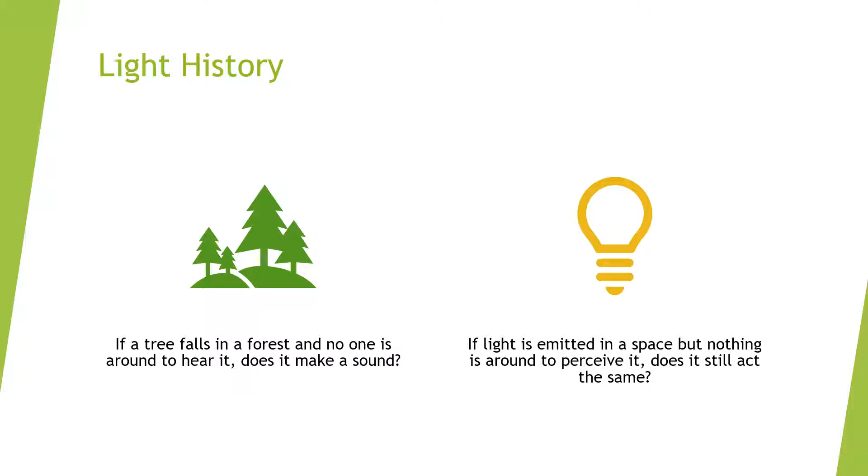So getting into the history of it, I'm sure you've all heard this before: if a tree falls in a forest and no one is around to hear it, does it make a sound. The equivalent in the lighting industry is: if light is emitted in a space but nothing is around to perceive it, does it still act the same? We'll get into that later.

Light's been around a very long time, obviously. We've been experimenting and exploring it for a very long time. One of the first documented instances—emphasis on documented—was with the ancient Egyptians and Mesopotamians. They developed the first thing you would call a lens from polished quartz. There's a bit of a lag there, and then we see a huge push of understanding, questioning, and theorizing with Alhazen.

He's not Persian—I'm forgetting the territory, I apologize—but he's considered the father of optics. It was in the 11th century.

He proposed a lot of what was later experimented and hypothesized and actually carried out in the 13th century. We see that with Roger Bacon. He kind of gets credit for this, though there are several who have done research on this, and it's that light refracts from objects. Then later we see the first wearable eyeglasses invented in Italy around 1286. This led to an optical industry in the 13th century, particularly around the Florence and Venice city-states territories, and this development and standardization and understanding of how light behaves and how we can influence its behavior led to the inventions of the optical microscope and the refracting telescope.

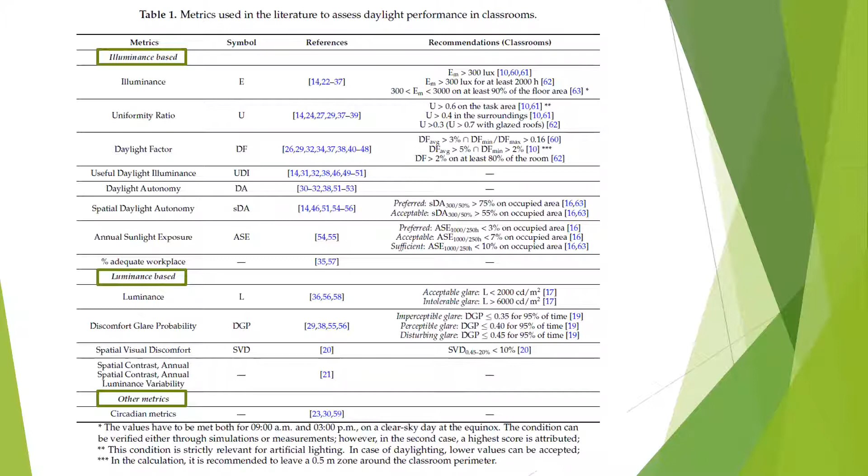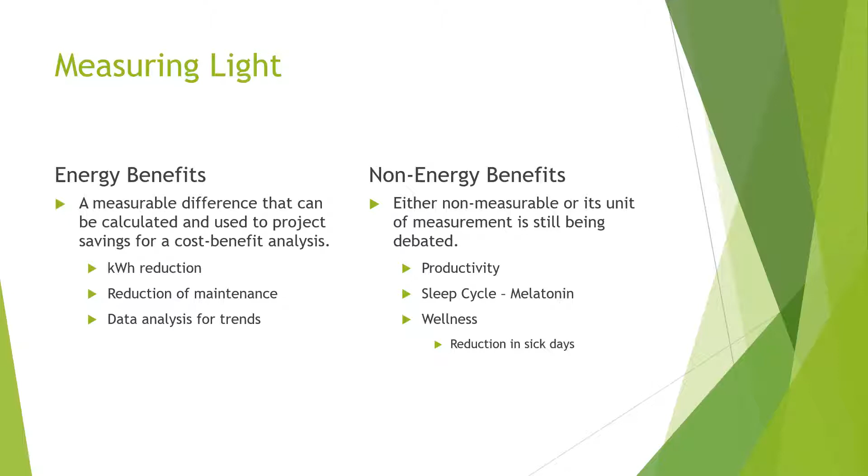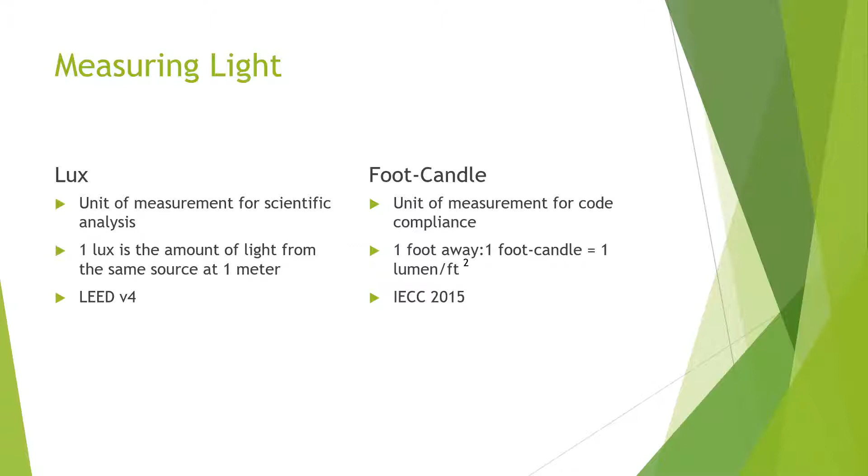I'd rather do calculations with lux than I would with foot candles. Foot candles being the unit of measurement for code compliance. So 1 foot away, 1 foot candle is equal to 1 lumen per square foot. You'll see this in IECC 2015, 2018, etc.

So if you want to know more about foot candle recommendations and recommended guides for space types or buildings, you can check out the Illuminating Engineering Society - just Google IES foot candle recommendations. In addition, manufacturers in like the last 5 years or so have begun developing their own recommendations to go with their products on what they feel the recommended light level should be for space types and how their fixtures can be programmed to meet those needs.

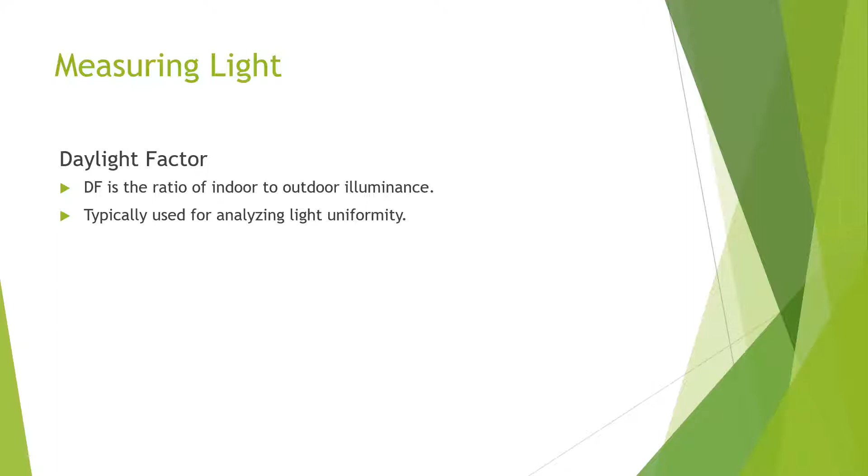So daylight factor, this is kind of the original measurement value. It's the ratio of indoor to outdoor illuminance. It's typically used for analyzing light uniformity.

And that leads us to the useful daylight factor / illuminance. So it can be presented as factor or illuminance, just keep that in mind. But it is the percentage of time when useful daylight is available, i.e., during building occupied hours.

So it's just taking the weather data from your city, your climate area, and then specifically applying it down to your site, plotting that and figuring out the angles of incidence for solar altitude, figuring out how often the sun is going to be available, whether it's mostly overcast or mostly clear, or a hybrid mix in between. That's going to help you inform what daylight strategy you want.

So if you have a site where it's mostly overcast, like in this example they have in the book, St. Louis, Missouri, you can still do daylighting - you're just not going to do it in the traditional sense. Skylights, believe it or not, actually receive more light on overcast days than they do on clear days, and that has to do with the sky radiation and diffusion of sunlight.

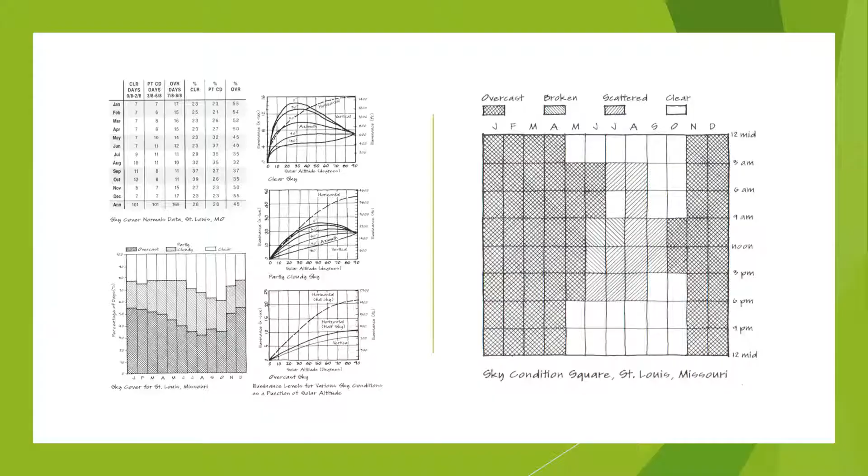So why did we move away from that? Well, there are some limitations. It does not consider non-overcast sky conditions. There's no glare consideration, and it typically recommends oversized windows. So we're over-designing.

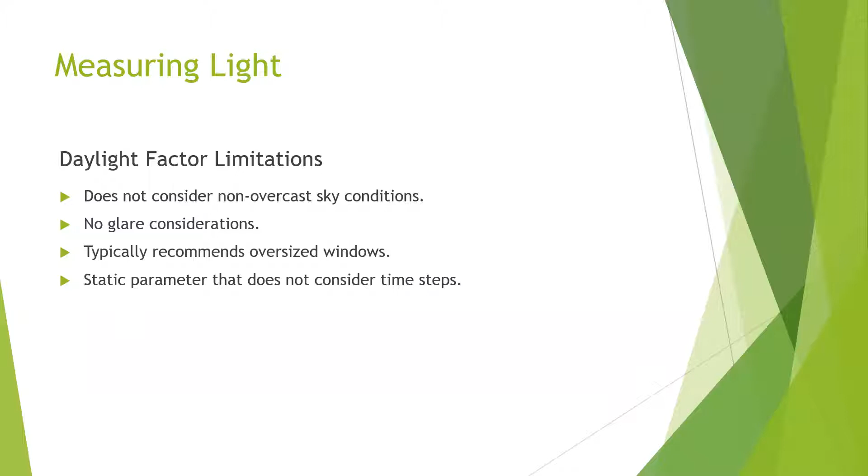And then it's a static parameter. It doesn't consider time steps, so it's not accounting for occupied hours throughout the entire year, various times of day, depending on what your building occupancy is. But that's not to say it's worthless and we should do away with it and never think about it. It's mostly just for early design, to get you started, so you can understand where you are, where you need to go, and how much work that's going to be.

So daylight autonomy is kind of what replaced that. It's an annual daylight metric, but it's now referred to as a dynamic daylight metric. That's mostly because people tend to confuse daylight autonomy with spatial daylight autonomy. I know it sounds weird, but they are two separate terms and they mean different things.

It's expressed as a percentage of annual daytime hours for points in a space that are above a specified illumination level. Notice I didn't say anything about space or area. That's daylight autonomy—it cares about the quality of light for annual daylight hours for points in a space. It doesn't care about how much area you have, what's illuminated, what's not. It's just trying to understand what is the daylight autonomy of this space or building, if you're doing a whole building.

So this was first proposed in 1989. I'm not going to even try to pronounce the name—it's French, I'm sorry. But it's basically the French version of the Illuminating Engineering Society. If you weren't aware, IES is referred to as IESNA internationally. But it really takes off and gets picked up for standardization later on, thanks to a gentleman like Christoph Reinhart, between 2000 and the research he did between 2001 and 2004.

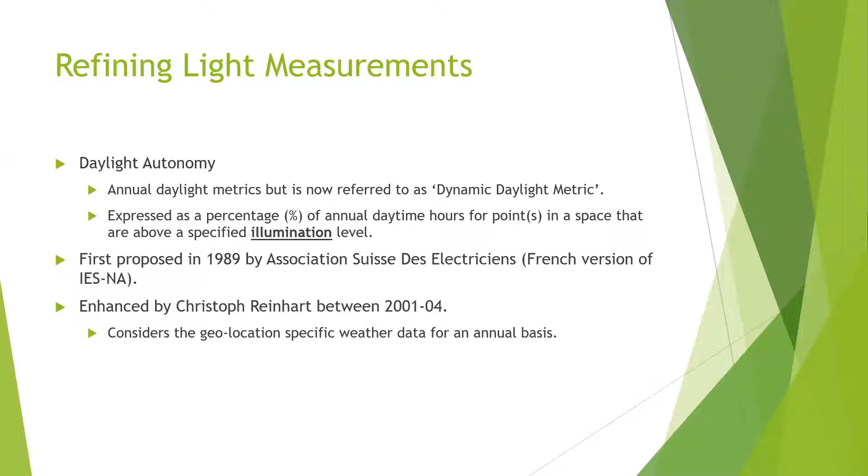What's so special about this research is that it considers geolocation-specific weather data on an annual basis. So the definition of daylight autonomy was reevaluated to be measured according to defined sensors elevated above a floor area in spaces. It calculates the amount of daylight illuminance required for a specific task over occupied times of the year. Minimum thresholds were determined by IES.

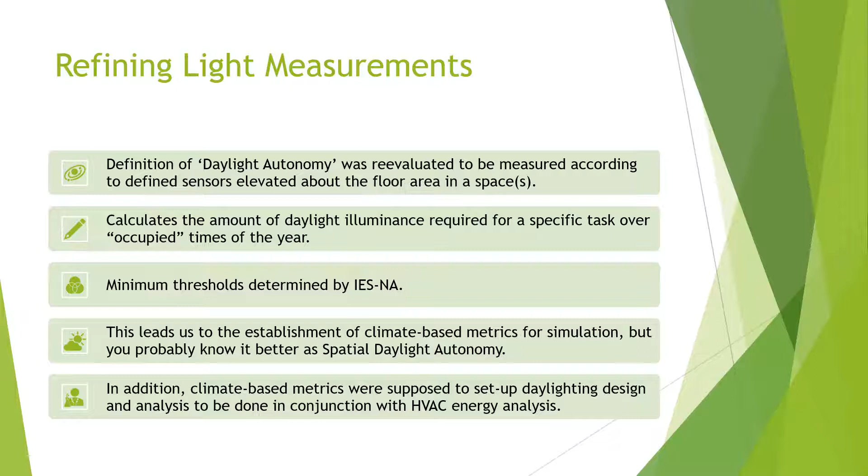This leads us to the establishment of climate-based metrics for simulation, but you probably know this better as spatial daylight autonomy. In addition, climate-based metrics were supposed to set up daylighting design and analysis to be done in conjunction with HVAC energy analysis. Now that exactly didn't happen, unfortunately, but I'm hopeful that with the changes made in 4.1, it will encourage or incentivize that to actually become a reality.

So let's talk about spatial daylight autonomy. SDA is the percentage of a space that can be daylit most of the time. It's written like this: you'll see SDA, and you'll see 300 over 50 at 55%. The 300 over 50 isn't set in stone—that represents the minimum threshold you're setting your lux value to. In this case, it's 300.

And then you want to know how often it's meeting that threshold. So in this instance, we want to know how often, 50% of the time, it's meeting 300 lux. So you'll see it expressed as 300 over 50 at 55%. What that's saying is at least 55% of the area is illuminated to 300 lux at least 50% of the time.

Annual sunlight exposure, or ASE, is the percentage of a space that receives too much illumination, resulting in glare—so this is our ceiling. It's written the same way, but it has different thresholds because it's our ceiling, not our floor. So ASE 1000 is 1000 lux, at 13%, meaning no more than 13% of the space receives more than 1000 lux for more than 250 hours per year.

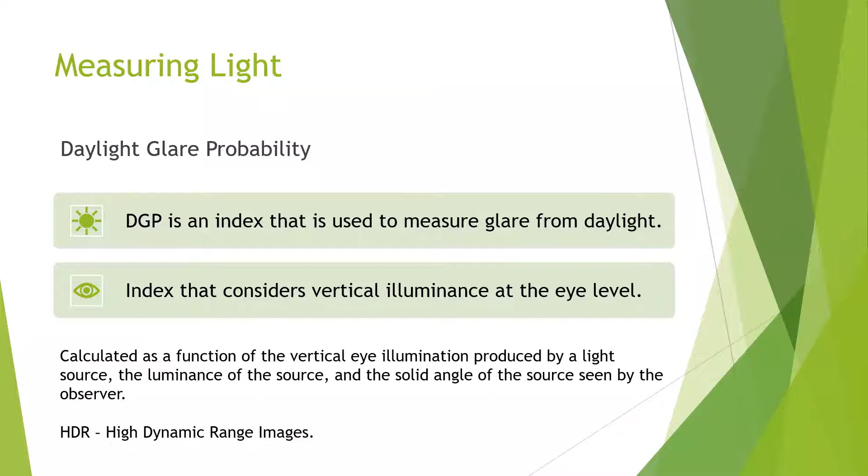Commonly, it's not agreed upon what the actual range is, and what people find uncomfortable versus tolerable. However, the general consensus on the best way to investigate this is through high dynamic range imaging. I want you to be aware of that, because that's what ASE is trying to do—it's trying to standardize predicting when in a space there's going to be too much light that makes the occupants uncomfortable.

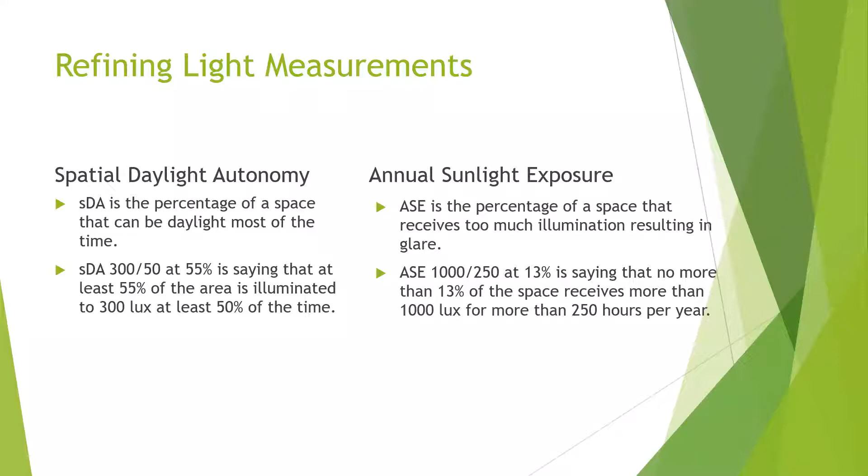So let's get into the standardization of lighting measurements. This is an example I like to use, LEED versus IECC 2015.

If a space is considered regularly occupied, it will be considered for the LEED daylighting analysis, and I mean the entire space. That includes the primary daylight zone, the secondary daylight zone, and the tertiary daylight zone, which is basically just the remainder of the space.

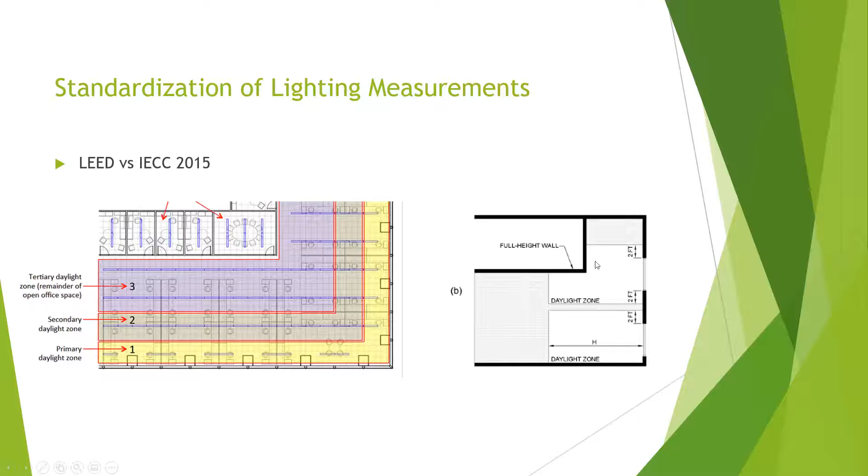Whereas IECC has a predefined script for you to follow. It'll tell you to take from the floor to the top sill height of the window, and that's your H - how far your daylight zone extends into the space. Then the width of your daylight zone is the width of the window plus 2 feet until you get to a full height wall or obstruction.

Spaces with a total of more than 150 watts of general lighting within side-lit daylight zones, complying with side-lit daylight zones, are required to have photo controls. LEED doesn't really ask you about photo controls or anything like that - that's more of just the IECC side.

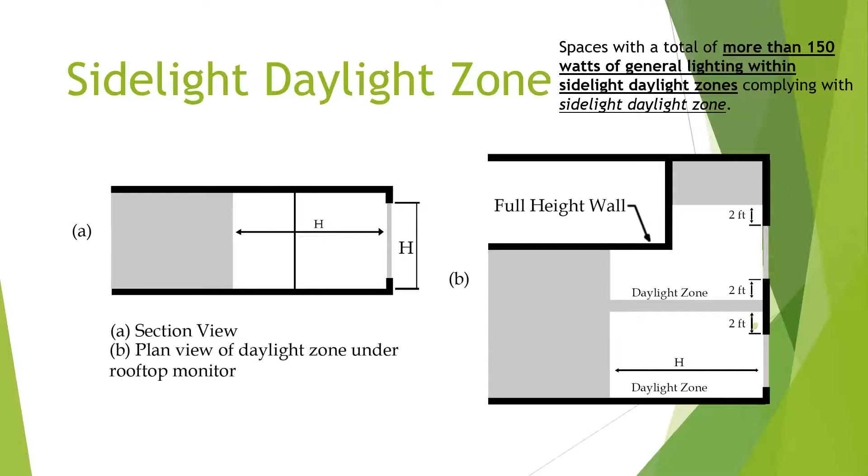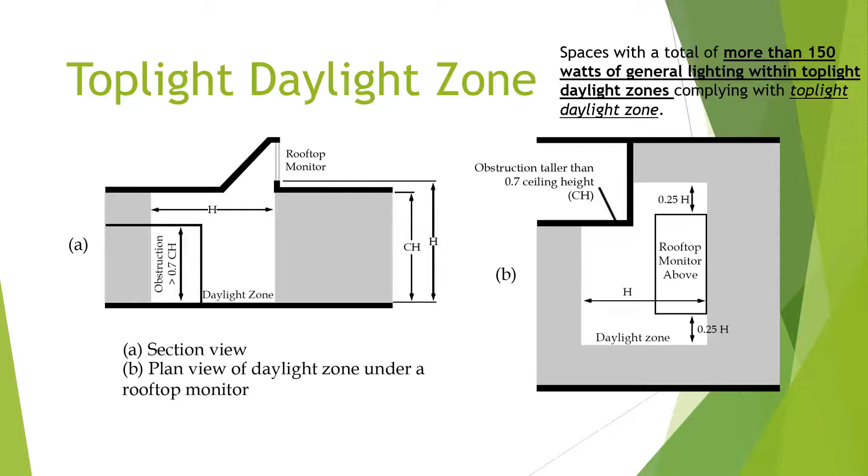But I just want to give you an example of how it defines its daylight zones. Then you have top lit daylight zone, which deals with rooftop monitors, clerestories, Solatubes, and it also deals with skylights in a particular way. But we're not here to talk about IECC, so just wanted to breeze through that.

Let's talk about LEED now. LEED stands for Leadership in Energy and Environmental Design. V4 introduced the use of climate-based daylighting, spatial daylight autonomy, as a simulation-based compliance path for the daylighting credit. The reason why is SDA has been shown to be a reliable indicator of occupant perception of daylight availability.

So what that means is basically 9 times out of 10, what we simulate is actually what it looks like and is perceived as in the real world. That's why SDA has been such a strong metric for us to use.

ASE is kind of where we get into a problem, but that deals with the illuminance versus luminance based metrics. The intent is to connect building occupants with the outdoors, reinforce circadian rhythms, and reduce the use of electrical lighting by introducing daylight into a space.

I'll tell you right now, none of that is true. None of what LEED requires incentivizes you to do any of that. So I appreciate the intent, but the execution is not really there.

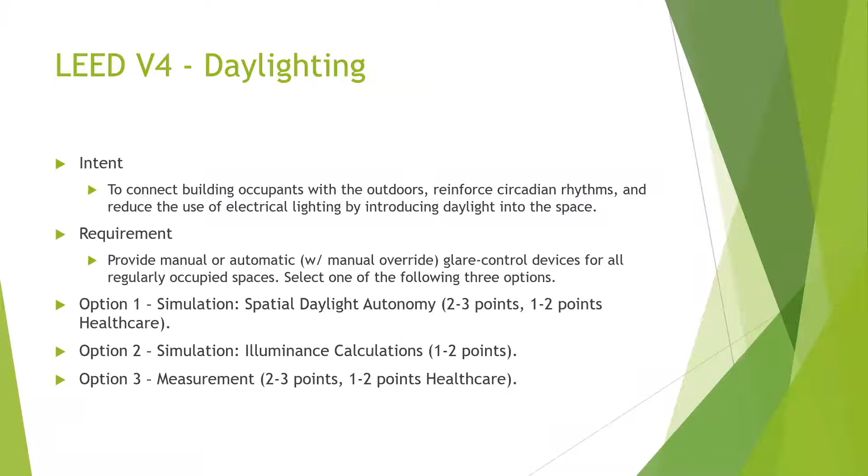So let's get into option 1. Here's what option 1 looks like. Probably the biggest problem I have with the LEED daylighting credit is the second bullet point of 'use regularly occupied floor area.' That is such a broad, generic term that it literally fits almost everything in there.

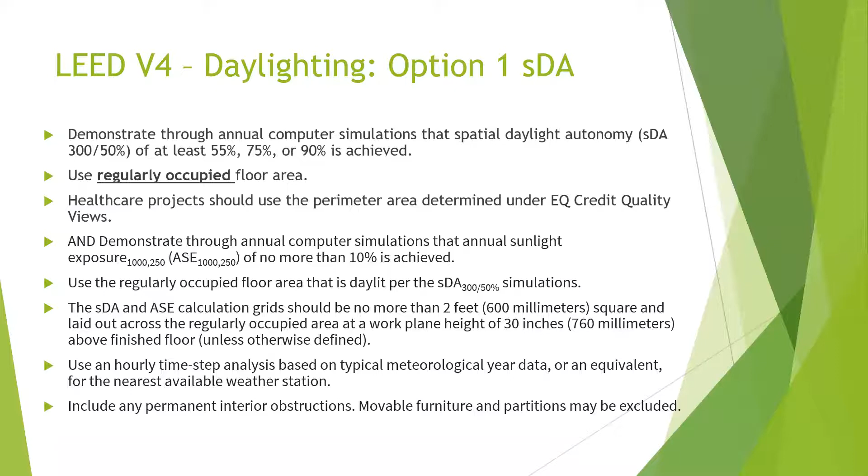So that's probably my biggest problem with it. But let's get in and break it down point by point. Kind of what I define to be regularly occupied is a space within a building that will regularly have occupants within a space during business hours.

Now that can be open to interpretation and challenge, because what do you define as regularly occupied? Is it people coming and going into a space frequently, or is it someone coming into a space and staying there for an extended period of time? There's multiple ways you can interpret this definition.

But typically what it does exclude are the generic ones right out the back: mechanical, electrical, restrooms, probably get away with excluding a vestibule, things like that. But that's one of the biggest cons I have - for the V4 version, it doesn't actually define or give you parameters to define what will fit into this box and what won't.

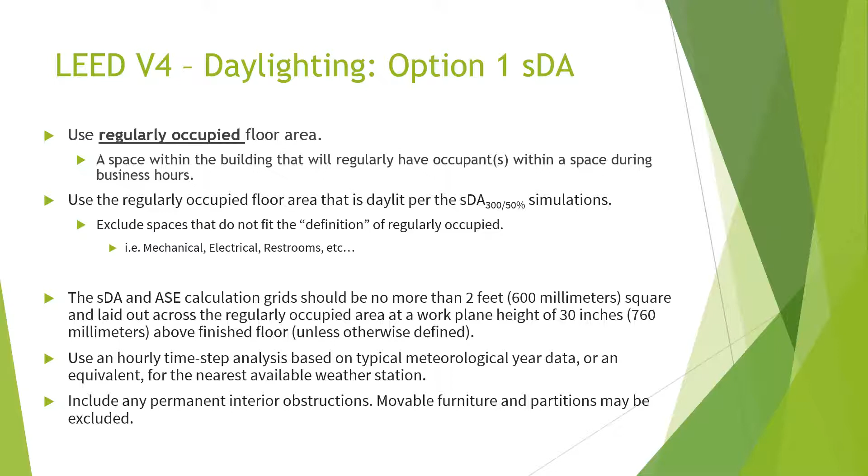So then the calculation grids, where you're placing your sensors in the building. The grid should be no more than 2 feet apart, so you can go less. I would not recommend going less than 6 inches. It's going to be more heartache and way more computational power than you want to expend, but laid out across the regularly occupied area at a work plane height of 30 inches above finished floor, unless otherwise defined.

So here's kind of what that looks like. Some of it's open to interpretation. They don't mention it in V4, but there is an IES standard called LM83 that references spatial daylight autonomy and ASE. It gives you recommendations for placing grids and how to do that. That's where I get that no less than 6 inches from. But here, I could include this row of sensors or I could exclude them, and that's the way you determine if you should do that or not. It comes from that LM83 standard from IES.

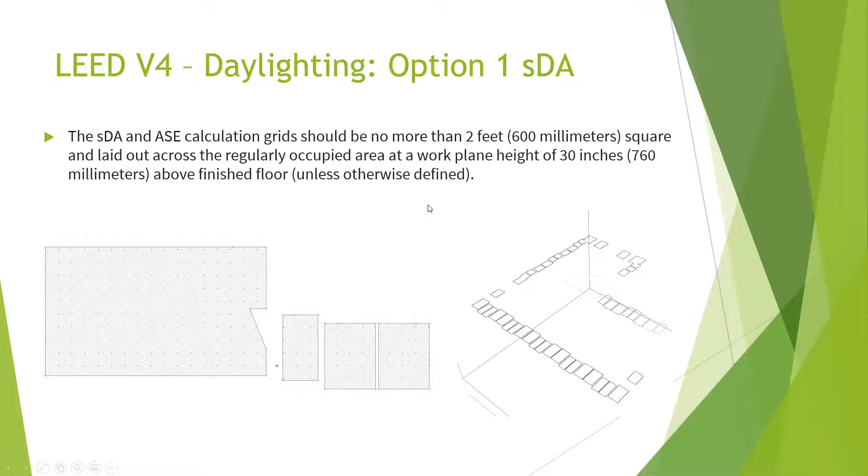For example, like this one right here, it populated sensors on here for whatever reason, so I had to go in and tell it, hey, don't include those sensors, they're in the wall. So just up to your discretion. Typically the 2 feet by 2 feet is enough resolution to get you an accurate picture of what's going on inside the space while minimizing computational time required for the simulation.

So next, we're going to need to do an hourly time step analysis based on typical meteorological year data, i.e. your typical TMY, TMY3 weather file.

And this one was more open to interpretation. You could do 8 a.m. to 4 p.m. or 9 a.m. to 5 p.m. if you just explain why the building occupied hours were slightly different than what they standardized. But those are the two that I typically have been asked to use in projects.

And then lastly, it wants you to include any permanent interior obstructions. Movable furniture or partitions may be excluded.

And so the reason why this is important, we have our design tools here at the IDL Boise website. It's under services, so if you click on design tools, we have a handful of them, but the one I want to show you right now is a daylight pattern guide. And so if you go there, you click on patterns, and you go to workstation partitions.

This is why modeling permanent furniture and partitions in spaces is very important, because they will affect the performance of the daylight in the space, either by helping you or it could hurt you, depending on how you design and the height of your partitions. I would not recommend having any partitions above 30 to 36 inches, that's just my recommendation, if you can. So that's what this scenario looks like: basically the partition is at desk work plane height, so you still have it to divide and help define the space, but it's not hindering daylight as much as if it was open, and in a simulation I can exclude these to help because the work plane height is just above it.

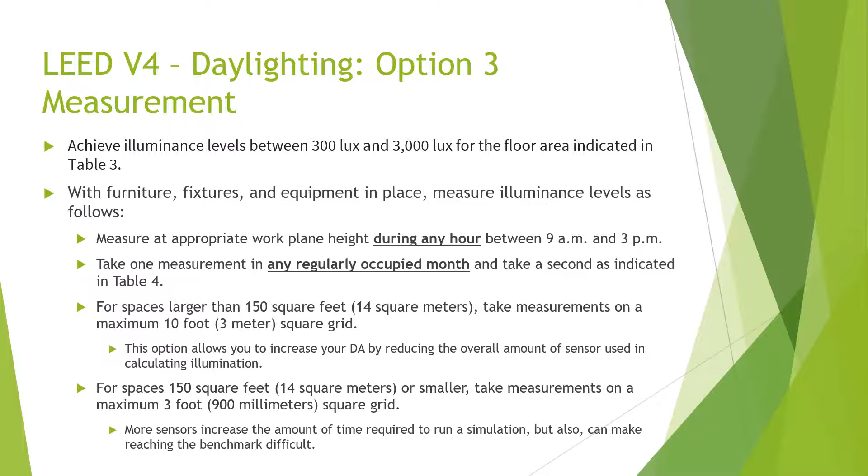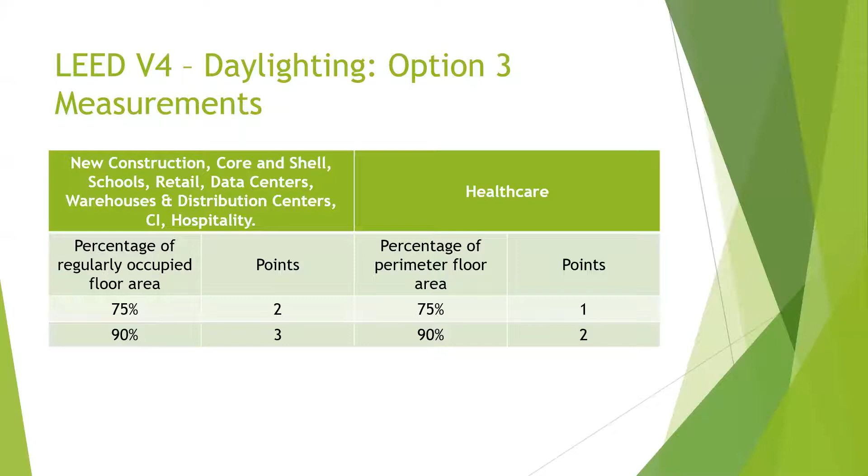And this is what the table looks like for scoring: you need the 75% for 2 points and 90% of your area for 3 points. What it's talking about when it says your first measurement is any hour of any day in the month from the first table, between 9 a.m. and 3 p.m. So let's say we choose May, because May is a good month.

We know from our basic annual simulation that May performed better than all the other months, so we're going to choose a day in May for our simulation. Then for our second one, we have to choose somewhere between September and January. So that's what that means. Are there any questions so far? That was me just giving you the overview of V4. So if you have any questions before we get into what's changed, just let me know.

Okay, so the intent hasn't changed, as well as the requirements - still asks to provide manual or automatic with manual override glare control devices for all regularly occupied spaces. One of the things I liked about 4.1, the changes they've implemented, was it lowered the bar and gave different tiers that you can apply for. Probably the biggest one is that you're allowed to, not really exempt, but appeal for an exemption for if a space should be regularly occupied, i.e. if it should be included in the area calculations for your daylight performance. Those are the big changes that I've liked that they've done, so we're going to go through some of those.

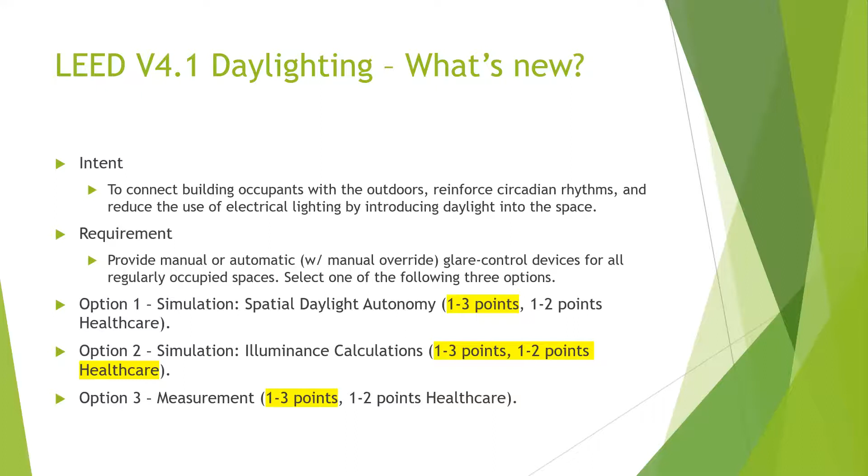Healthcare projects must use each regularly occupied space located in the perimeter area determined under EQ credit quality views. I mentioned healthcare a little bit, I'm on the detail for it. The reason being is you should not be daylighting your hospital. The only 2 space types in a hospital, in my opinion, that should be daylit are the lobby and the patient recovery room.

Now, as said, exemptions can be made. Say a medical facility is for rehabilitation, things like that, of that nature, where there's not actual procedures or anything like that—so like retirement homes, those healthcare project types, you should be considering for daylight, but definitely not hospitals.

Additionally, calculate the average SDA 300 over 50 value for the total regularly occupied floor area. For any regularly occupied space with ASE of 1,000 over 250 greater than 10%, identify how the space is designed to address glare. This was probably the #1 culprit for projects I worked on in the past 2 years on why they would meet the SDA requirement, but ASE would throw a wrench into the accreditation plans. It was really hard to meet both of those standards. The bars were set really high.

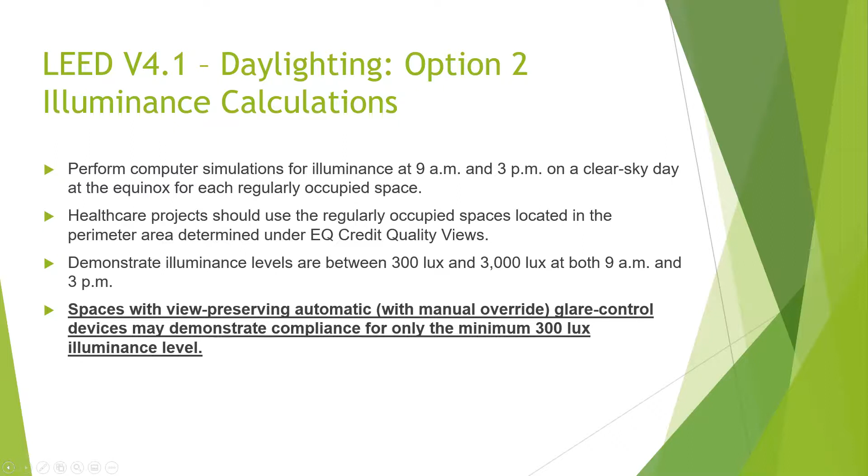Spaces with view-preserving automatic, with manual override, glare control devices may demonstrate compliance for only the minimum 300 lux illuminance level. Does that make sense? It's a very important change. It allows this option to become so much more viable, and not easier to obtain, but obtainable now, whereas before it didn't really seem attainable.

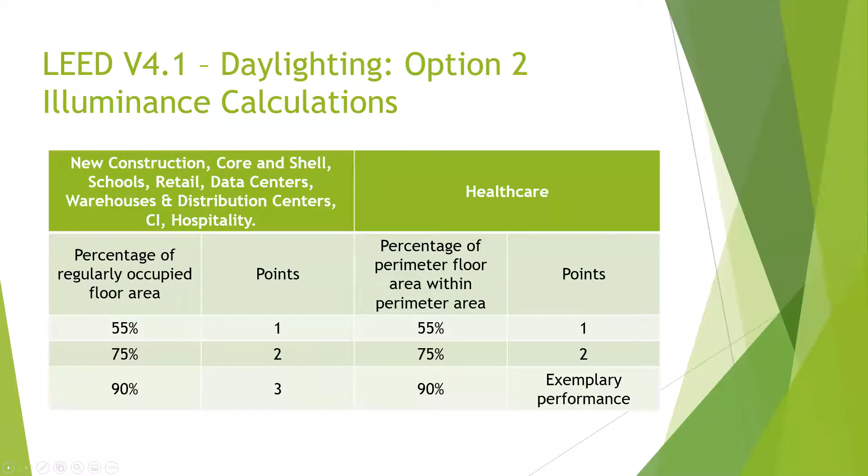Continuing, again, all this hasn't changed from 4 to 4.1. You're still going to use your typical TMY file for meteorological data. You're going to select a day within September 21st or March 21st. You're going to exclude blinds or shades from the model, include any permanent interior obstructions, movable furniture and partitions may be excluded, and then assume the following default surface reflectances if finishes in the space will not be completed. Again, that's the same from option 1 carrying over.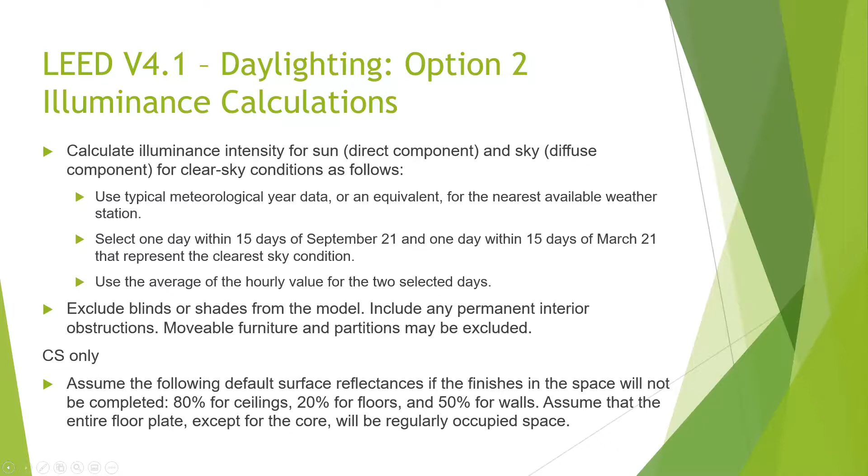So option 3 again has the same exemption in it, which is spaces with view-preserving automatic glare control devices may demonstrate compliance for only the minimum 300 lux illuminance level.

And the other thing that changes, if you don't remember, that's why this one is considered a measurement option instead of being labeled properly as simulation, is because you're taking 4 different measurements throughout the year. And so that changes the point distribution.

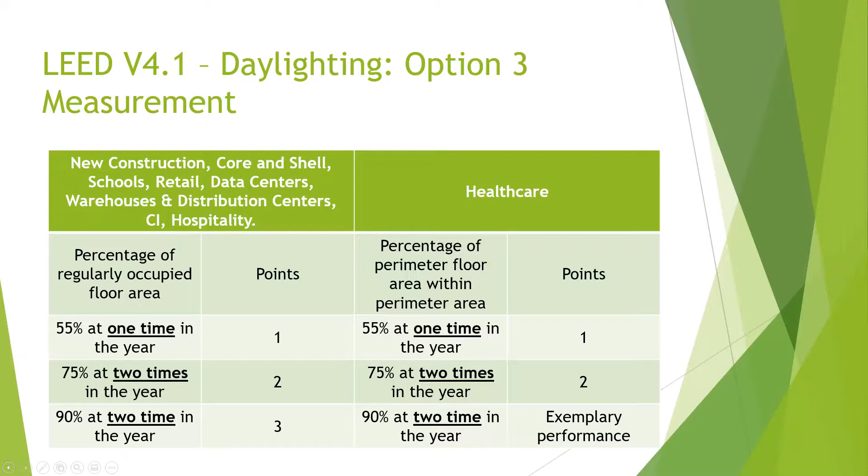So it's now 55% at one time in the year, so you can apply for just 1 point. You don't have to go for 2. But if you want to go for 2, it has to be 75% at 2 times in the year, and then 90% at 2 times in the year as well will get you 3 points.

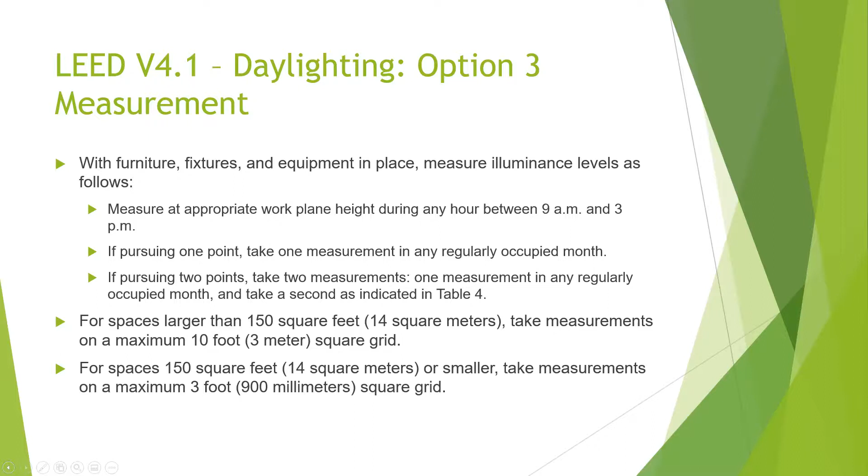Again, this pretty much stays the same, except for these bullet points: if pursuing 1 point, take 1 measurement in any regularly occupied month. If pursuing 2 points, take 2 measurements—1 measurement in any regularly occupied month, and take a second as indicated in table 4. Grid calculations and spacing stay the same.

So basically, if you only want to apply for 1 point, you would just take a measurement from this column. But if you want to apply for 2 points, you're going to take a measurement in this column. As we said earlier, we chose May, so let's choose May again. We would take it from there and say we get a point, but we feel pretty confident that we can apply for 2, so then we're going to take our second measurement here. That could get us 2 points.

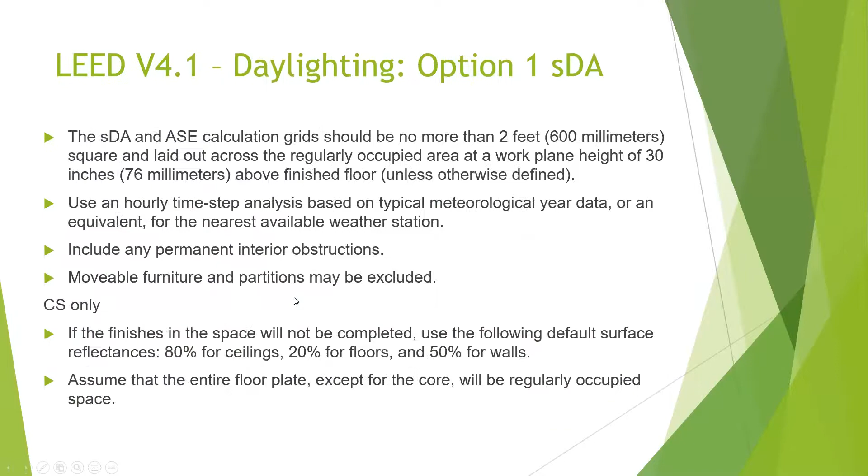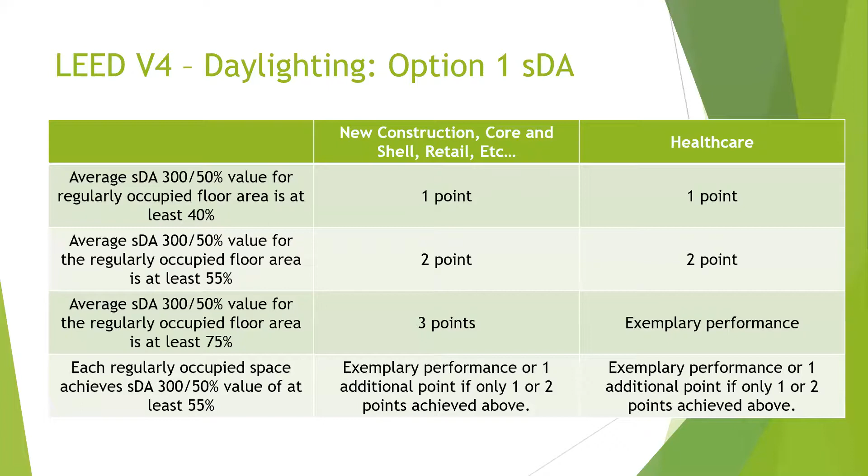So options 2 and 3 become a lot more viable with this phrasing right here. And then option 1, the bar got lowered, but in a good way, in that it needed to be lower. There needed to be more tiers of acceptance for the quality of a daylight design.

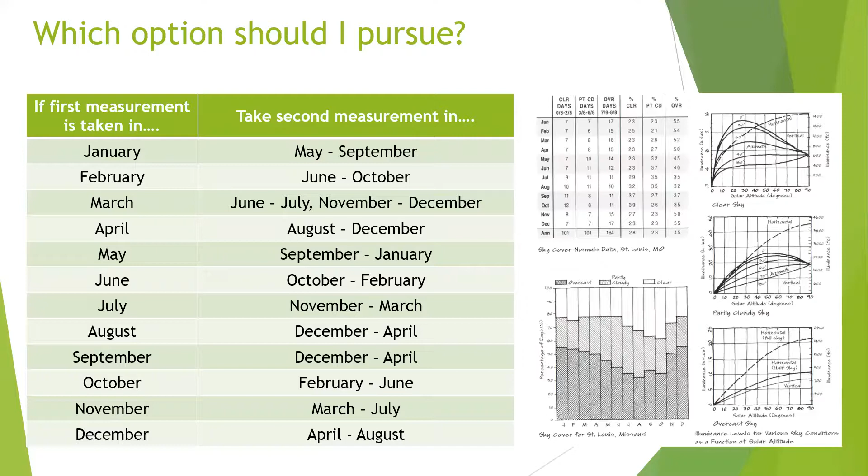So what option should you pursue? Well, again, this comes back to early daylighting design and analysis. Having that early analysis on how the sun is going to behave in the climate at our site, as well as at the building level, will help us inform which measurements we should be taking and when, say if we're pursuing option 3.

What I like to do for a project that comes to me and says, hey, we're interested in doing LEED and we want to apply for it—first thing I do is break out the calculator and an Excel sheet and do some math.

What's the area of the building? The daylight harvesting area isn't area that I'm defining as a designer that should be daylit and has photo controls in it—that's what IECC defines. So that's the daylight harvesting area line. Then I look at what LEED is going to consider for the daylight area, and we run the numbers. I can also break it down by individual spaces.

Then we run the numbers and say 75% of your total area—say we're going to try to get you to 3 points, the maximum overall. You're going to need 8,450 feet to be daylit at 300 lux for at least 50% of the time, which is about 1,600 hours. So it's quite a bit.

Then I'll run through and show here's 55% of it, or say you only want to apply for the first floor or just the second floor, to know the differences and see which floor needs adjustments. I'll give you those numbers as well, so you have an idea of the amount of area that needs to be daylit. Is it actually feasible or possible for us to do this? How much is it going to take us to invest in this to achieve it?

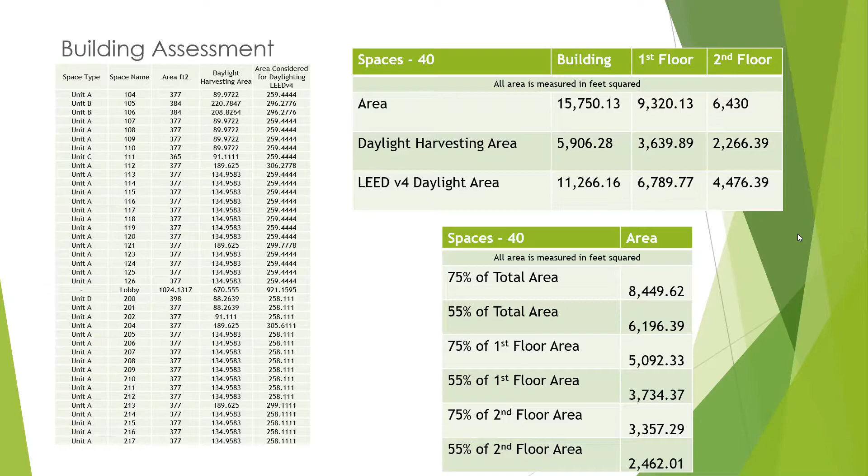One of those ways—you've heard me speak in the last year, I've definitely made it known I'm all about parametrics right now. So one of the things you should do in early design is parametric analysis, i.e. creating multiple versions of a model, figuring out what's going to work, and combining those with other iterations.

This is an example of determining that. A gentleman took the most typical space types of schools, and he basically played with the parametrics of it—window to wall ratio, orientation, etc.

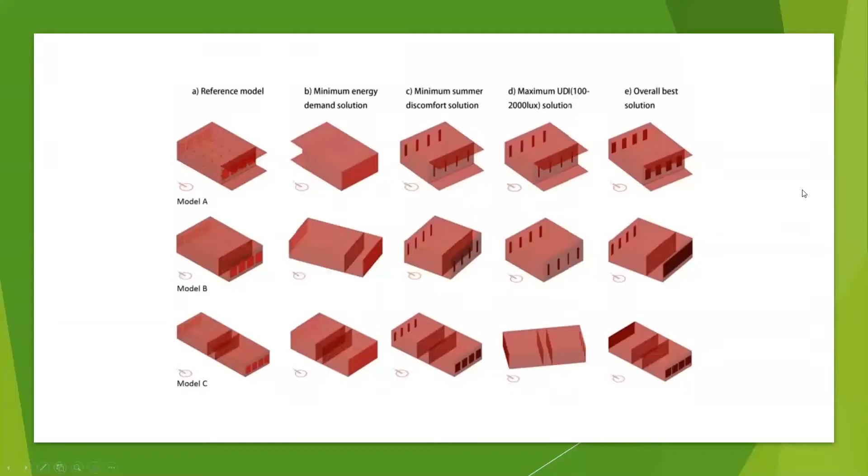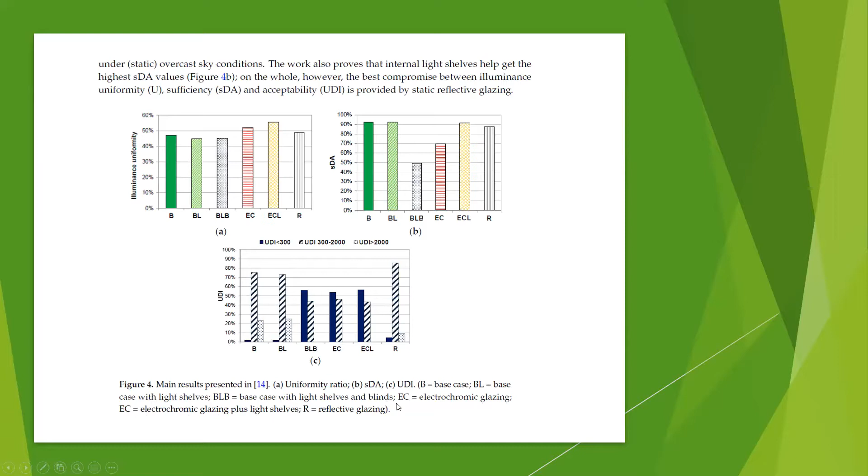I like this study from this paper. They basically take all of the lighting measurements or units I've been talking about—illuminance uniformity, sDA, UDI, etc.—and plotted them against different strategies he was using. So you have the base case, then the base case with light shelves, base case with light shelves and blinds, electrochromic glazing, that electrochromic glazing plus light shelves, reflective glazing, and compare them all across.

In addition to doing that and preparing you for achieving daylighting credit, or informing you whether you should try to apply for it, you can get this credit as well as doing work you were already going to do to meet your ASHRAE 90.1 standard, or showing performance above the required baseline, etc.

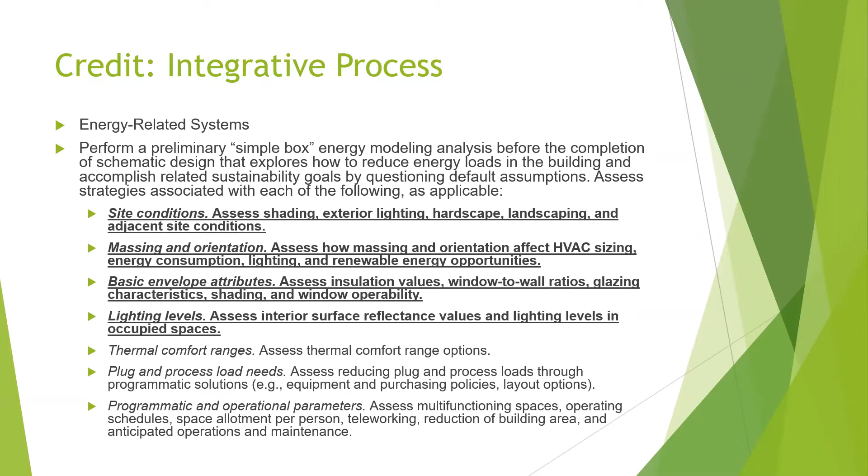So I definitely encourage you to revisit daylighting as a potential concept for your buildings using 4.1. It's still not easy, but it's also not impossible anymore, if that makes sense.